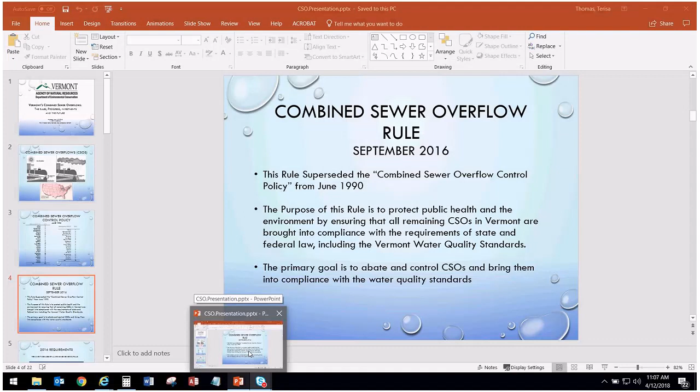Jessica, can I interrupt for a second? Sure. I just want to make sure I may have you present from some issues with what we're seeing online. So hold on, sorry for the interruption. All right, maybe just share the desktop. Yeah, I'm going to do that. Okay, you're good to go.

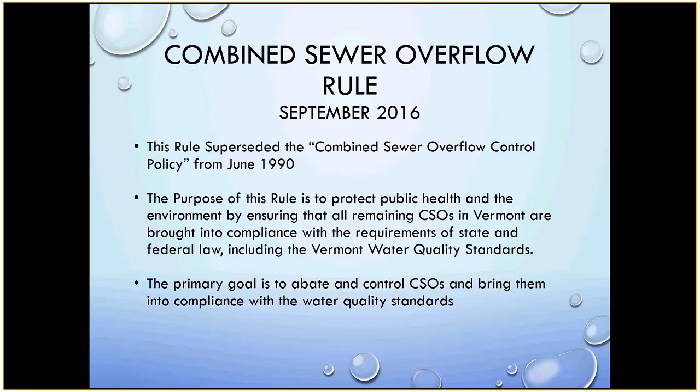Okay, sorry about that. Where are we? Finishing, moving on. Okay, so one of the interim requirements is permanent signage.

So all municipalities were required to put signs out at their outfall posts, and the state actually provided those signs for each municipality for all their outfalls for the first round. And this is important because some of our outfalls are located near recreation sites. So we want to ensure that the public is aware that during an event they should be avoiding swimming, fishing, any recreational contact.

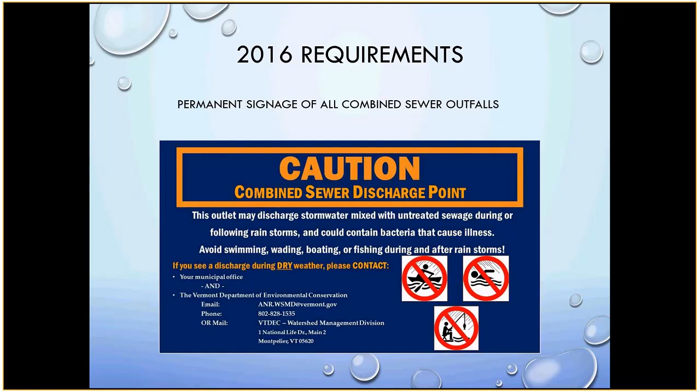And we do have municipalities check to make sure that these signs are still there. Sometimes they fall down, sometimes people steal them. I'm not sure, people may want them in their dorm rooms. I don't really know what you do with them, but so check Norwich and UVM. It's a requirement that these signs stay in place to inform the public of the health hazard that CSOs have.

Another requirement is to do a public alert notification. So via our ANR online, municipalities are required to report within 1 hour, no later than 4 hours, if they have a CSO event. And then within 12 hours, they need to submit a report that summarizes estimates on flow and times for the events.

And one thing that we are working on is we'd like to create a map that goes along with this notification that'll include the outfalls on the map. It can be interactive and can flash red if one is occurring at any given time. Also, this is something you can sign up for, so you can receive alerts at any time one is reported. You can see it for the entire state, or you can choose counties or areas of locations that you want to be notified if there are any notifications of CSO overflows.

This site also has untreated and unpermitted discharges. So if they're non-related to wet weather, but if a facility had, say, a sewer main break and there was untreated sewage entering waters of the state, that would also be posted on this website.

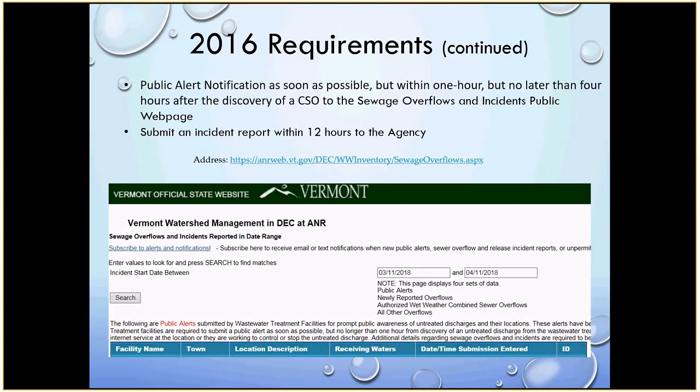Continuing with the 2016 requirements. So it's through the National Pollutant Discharge Elimination System, often referred to as NPDES, which is a Clean Water Act federal requirement, that any facility that discharges waters to this state is required to be permitted under this program, and Vermont is an approved program to issue these permits. What is required in these permits is that the water that is discharged has to meet state and federal requirements, and also meet Vermont water quality standards.

Vermont water quality standards dictate that we put limits on any discharge from a facility. These limits include limits on E. coli and pH and total suspended solids, as well as nutrients such as phosphorus and nitrogen.

So because these permits require that all discharges meet the Vermont water quality standards, the CSOs don't meet those requirements because they are untreated discharges in many cases. So what the 2016 Combined Sewer Overflow Rule requires is that if the facility is not in compliance, the agency must issue an order pursuant to 10 VSA Section 1272 or another legally enforceable mechanism requiring the municipality to develop or update a long-term control plan, which is subject to review.

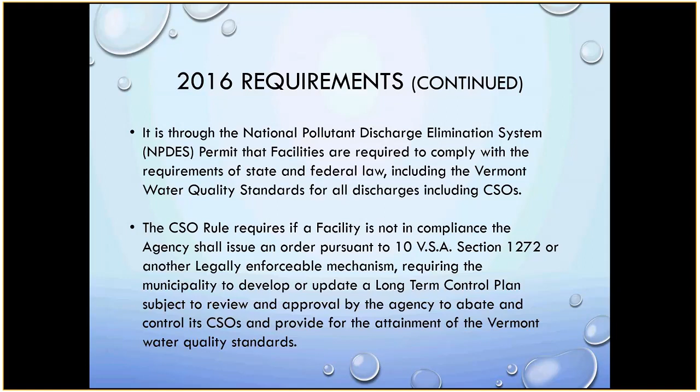Continuing with requirements, there are a number of requirements. There are 9 minimum controls that EPA has established that were also part of the policy back in 1990. One of the new additions is for the long-term control plans, we're requiring alternatives analysis to evaluate costs and performance of multiple CSO control alternatives.

And part of that is installing a flow metering system for each outfall. This is something some municipalities have already done, like Rutland, for instance. These are used in our analysis of doing it. There are some instances where these facets can't be accomplished, but they need to be part of the alternatives analysis.

Then reducing stormwater flows through the separation of combined stormwater and sanitary sewer lines. Adding storage tanks or retention basins to hold overflow during storm events. Places like Enosburg Falls have basins to retain the water during the storm event, and then they feed it back to the wastewater treatment facility at a later time when the event is over, so the water is still treated.

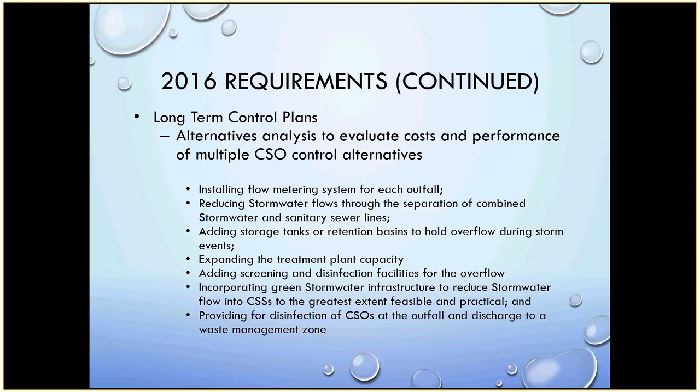Expanding the treatment plant capacity, adding screening and disinfection facilities for the overflow, incorporating green stormwater infrastructure to reduce stormwater flow into the CSS to the greatest extent feasible and practical. This is something that T is going to touch on a little later in the program. And then finally, providing for disinfection of CSOs at the outfall and discharge to a waste management zone.

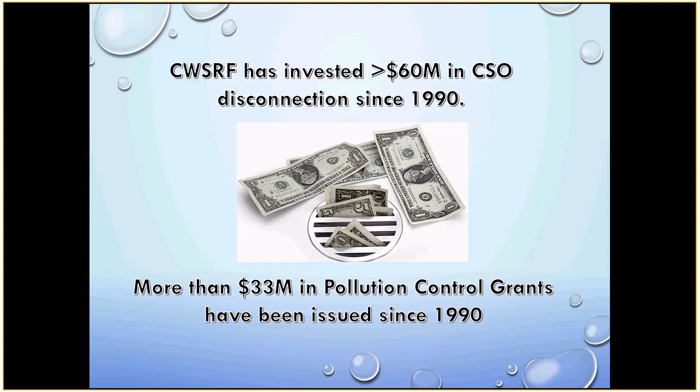Right now, our pollution control grants are categorical, which means the type of project gets a certain amount of grant eligibility. That's going to change in the next years. But this is just pointing out that, for almost 30 years, a huge chunk of our program's investment and focus has been on assisting municipalities in the very expensive and long-term costs related to CSO abatement. So that's a key focus of the program, and it will continue to be a key focus in upcoming years.

There are 2 left. They have invested through the CWSRF program around $12 million in the past 15 years. So for small communities like this, these are significant resources and significant local efforts made in trying to address these issues. I think the point that we want to make over and over again in the communities and the projects that we highlight here is that these are taken seriously, and a lot of money is put into these projects.

During the ARRA period, so this is stimulus, back in the 2010-ish time period was our stimulus years. A couple million dollars got put towards projects in Springfield, and additional money for pollution control grants throughout the years. Some of our staff had conversations with Springfield in preparation for this, because we really wanted to highlight the significant local effort as well as the state and local investment in these projects and these great reduction numbers.

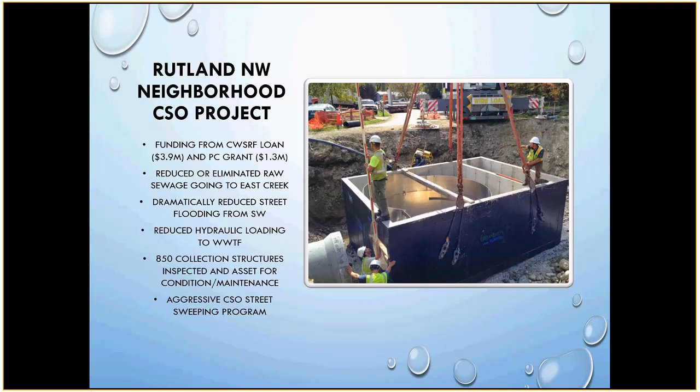We put out a call for projects every year, and Rutland has a number of additional CSO projects that are in the queue of planning and design right now. So they haven't let a lot of daylight pass between finishing one significant CSO separation and moving forward to the next - a pretty aggressive attempt at mitigating their CSO issues in Rutland.

So the next few communities we're going to highlight have all come to our office for funding in one facet or another. We're titling these roughly asset management, which doesn't automatically seem like it makes sense for a CSO separation discussion.

But the reality is these are really, really expensive projects with a lot of moving parts. If our communities don't know what their long-term plan is, they can't really go for the projects that are best bang for their buck and give them the prioritization of the steps they need to go through. So when we talk about asset management, assessment of conditions, prioritization and criticality, these are the communities we're really highlighting for taking significant steps forward.

City of Burlington has two pretty comprehensive projects. The first is a $1 million gravity pipe assessment project. They came into our office in 2016, and this work is ongoing. We forgave half of that, so they'll only have to pay back $500,000 instead of the full $1 million. I believe they got some money from the ERP funds, and they got a grant through the Clean Water Initiative program.

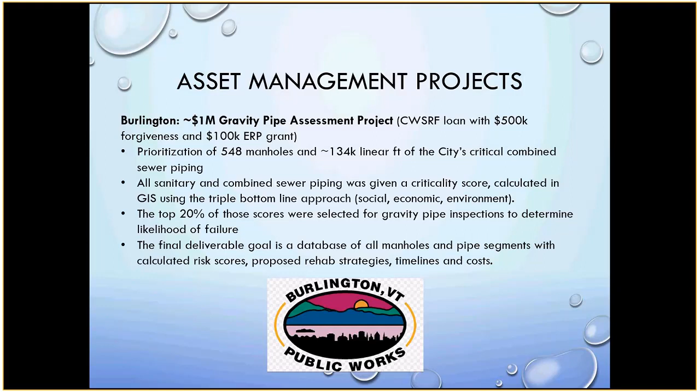Burlington gets two shout outs in this program. I'll give this one a pretty brief overview, but it's important to mention. Burlington is working on becoming first in the nation for an integrated permit. Integrated management essentially looks at the entire snapshot of the city's sources of phosphorus loading on Lake Champlain - instead of dealing with stormwater and wastewater separately, it looks at the holistic snapshot to figure out the best strategy to mitigate all sources of phosphorus.

So they came into us for around a $600,000 CWSRF loan.

We gave them $250,000 in forgiveness that they don't have to pay back, again trying to incentivize these kinds of concepts.

The project will focus on reduction or mitigation, so this is less of a goal of disconnection of CSOs and more of, in the meantime, how do we deal with reduction or mitigation of wet weather input whenever we have infiltration? Where can we possibly store it, or in the case of Enosburg Falls, send it back to the treatment facility, or if that's not possible, a slower release that will allow for infiltration where it is.

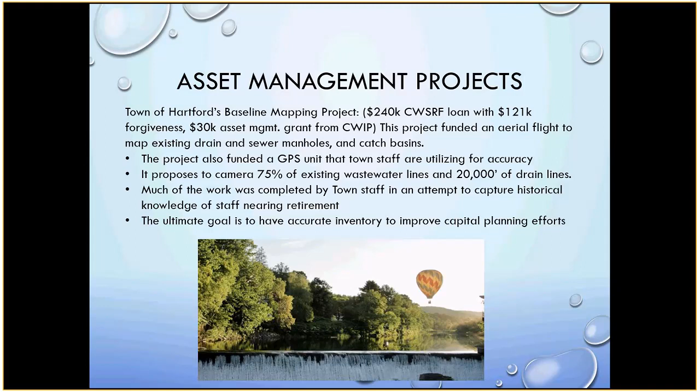I continue to point that out so that it's always recognized that these are real priority projects for our program. We're always looking at better ways to target and incentivize forward-facing, progressive utilization of asset management concepts to help them get to the best place they need to for their system.

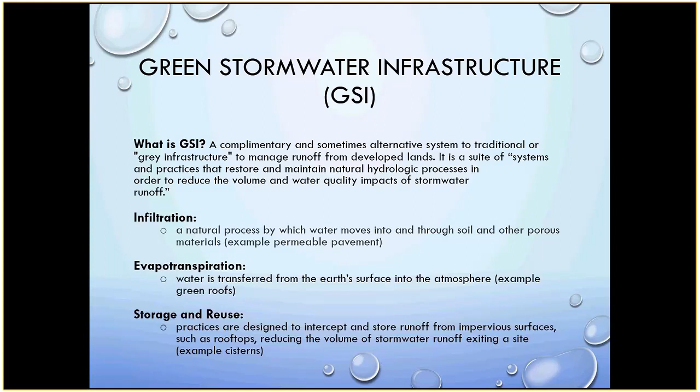As I mentioned, we're always looking for new and exciting ways to target all kinds of different aspects, not only of CSOs, but in this case green stormwater, which would help with the loading of the combined sewer system.

So we are proposing this year - I think most of our municipalities are aware of this - we've been working pretty hard to come up with this green stormwater sponsorship pilot. Green stormwater is not always possible, it's often not, but what we wanted to do is incentivize green stormwater practices where it is possible.

We believe it's cheaper, less maintenance, better bang for your buck, and again it reduces the amount of flow. The goal of green stormwater, the ultimate goal, is to try and infiltrate, to pretty much mimic nature as much as possible.

So in this sponsorship pilot, we are proposing to pair two projects together. When a town needs to come in for a pipe replacement project, we want them to identify a green stormwater project that they can couple it together with. Once both projects are completed, we will forgive the green stormwater piece. That's the long and short of it.

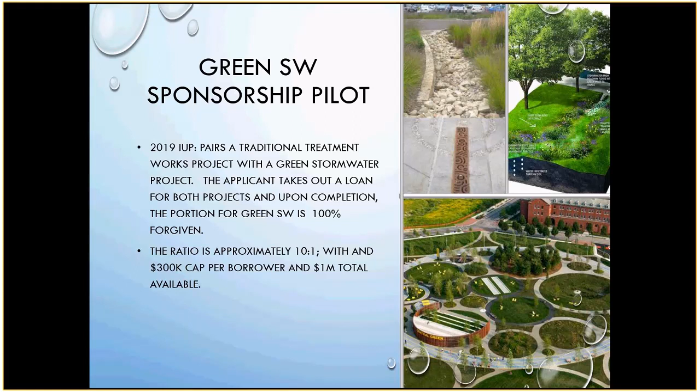Whoa, yeah, that happened quickly. All right, so with that, any questions? Questions in the room or online?

Go ahead, Jim. I wonder about any analysis done on the cumulative impact of CSO disconnection and associated impacts from stormwater and low precipitation events that was being treated by wastewater treatment plants now being discharged.

That's a great question, I don't know. Do you mind repeating it? Yeah, basically the ask is that in these communities where there's been separation and now stormwater is discharging directly to the waters of the state as opposed to going to the wastewater treatment facility, have we seen water quality impacts from that?

Is it actually a net benefit in the small storm events that tend to have the most concentrated stormwater? If there's capacity in the wastewater system, we want to allow that to continue to go there. I don't know of any analysis that has been done to look at that.

I wonder about the implications there for TMDL load allocations, if they're presumed to go to wastewater treatment plants and now they're suddenly not. That's a concern, yeah.

So where would green stormwater infrastructure not be possible? You mentioned there are some places where it wouldn't work - what kind of factors would be involved? Places like Rutland.